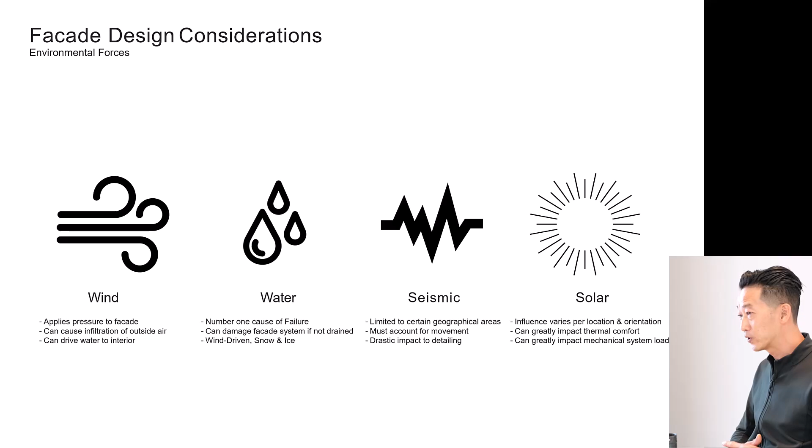Seismic, right? That's a bigger movement concern than wind even. If you're working locally here or some places in the world, seismic's a big deal, so that might be driving a lot of considerations. Solar, obviously everything to do with energy consumption, how we choose our coatings for glass, where we have opacity, where we don't. These are things we always have to consider as we're designing.

Then we move into things that are more specific to the building. Is it a floor-to-floor thing? Are there multiple floors? This influences how we're going to actually wrap the building. These things actually have to be supported, and a lot of times we go to the floors, but sometimes there are no floors. This building is a great example; we'll see some of that. Building deflections: with the wind and the forces, these buildings move, right? Everything moves.

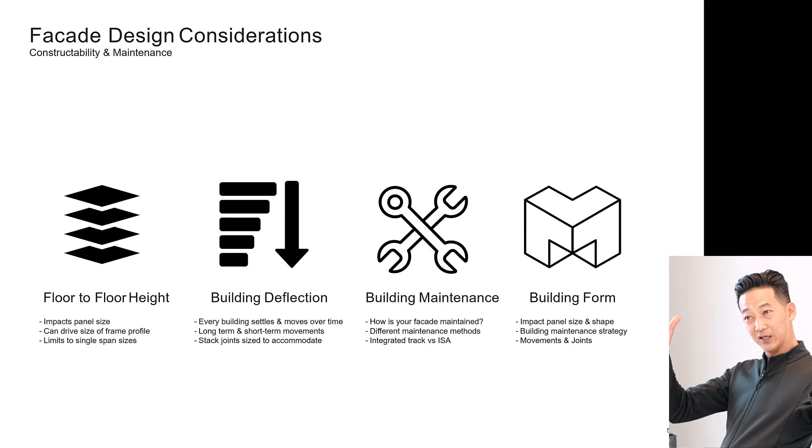Way early in design, I know specifically for a good year ahead of even getting to construction documentation, we were making sure that this classroom, which is kind of cantilevered in space, actually didn't move very much. And the reason being that curtain wall in between that long bar and this little space here, we knew that if it moved a lot in seismic, we'd get a lot of joints, right? So these are kind of things that all factor into, I think, in the end, the final aesthetics, right?

And continuity of joints, is that important? Is it not? Do you want to play with the joints? So, once again, constraints and how they can influence design. Building maintenance, you have to take care of your building, actually. How are you going to clean the glass or replace any panel in the building at any given time? And funny enough, if you figure this out, you probably figured out how you're going to install it as well.

And building form, like how complex is it? That's going to impact how you actually are able to install and maintain things, as said. And then, into specifics further, right? Manufacturing. Like, what are we saying? Okay, we like metal, or we like GFRC, glass fiber reinforced concrete, or we like precast, whatever it may be. All these materials have properties, right? And they also come with a certain kind of limit to how they're made.

If the thing, say, is metal, and it's a metal panel, well, you're going to be constrained by how it gets to the shop, right? Which is probably a coil. We know it's 5 foot wide. These kind of things, right? Tolerances, how tight are they being made there? And actually, how tight are things being installed?

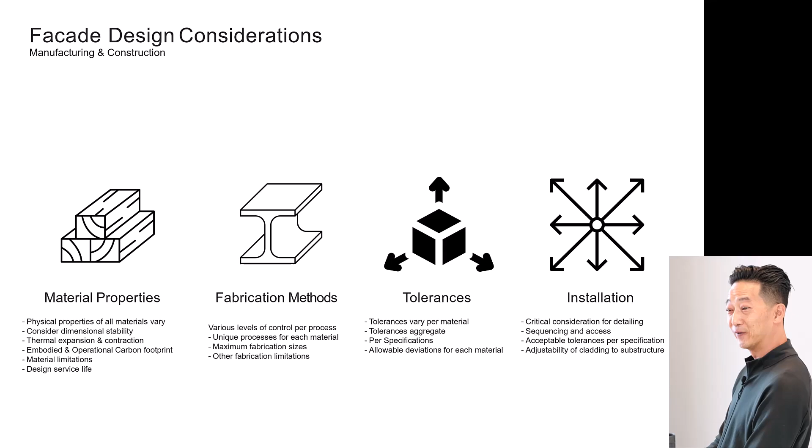And actually, you have an incredible amount of design power just through this little book of specifications, because at the end of the day, you can miss a lot of stuff in drawings, but if you have it in specs, you'll actually have some bargaining chips. Anyway, that's for way late in career, but leverage that at some point. Installation, once again, it's critical just how these things get installed. That's gonna really dictate if it's gonna be in budget, this, that, whatever.

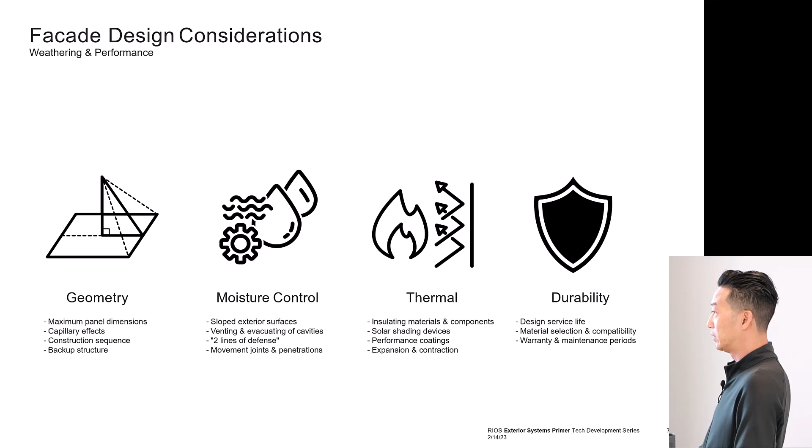Weathering performance, right? Geometry. Is there stuff where things are naturally not draining well? Is there stuff that's taking a lot of wind load? And then we always have to look through moisture control, thermal, and insulative qualities. Are there shading devices? Durability. So these are all kind of things that we have to think about. And I think at times some of these become larger constraints than others, but then those become opportunities, I think, also in pushing a decision.

So facade systems, real quick before we get into this deep dive. We talk about enclosures, and let's split it up into opaque and glazed assemblies, right? So if you look at an opaque wall, you might have a stucco wall there that you see as a barrier system. This means that that skin is actually where all the waterproofing happens. And anything past that is like a backup, but that's pretty much it.

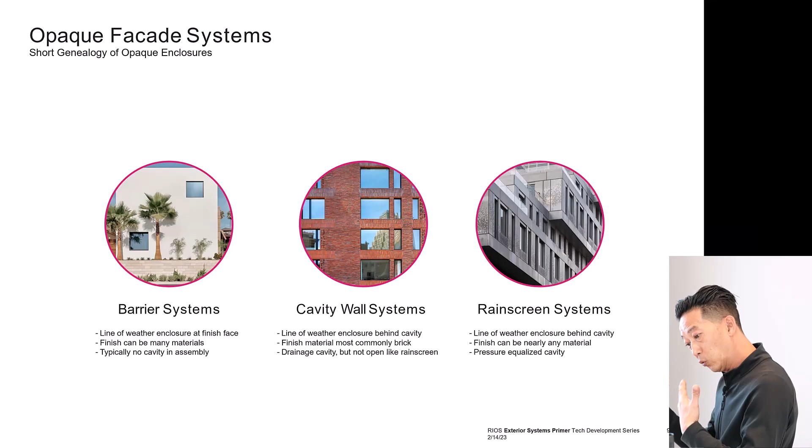Cavity wall, brick walls are a good example, right? In traditional ways, you actually have two wythes of the brick stacks that are actually creating a sort of cavity. The outer taking a lot of the weathering. Once again, I think there is some ability to have some drainage behind there, but the face is essentially taking most of the weathering. Any water behind there is just meant to be drained. It's ancillary.

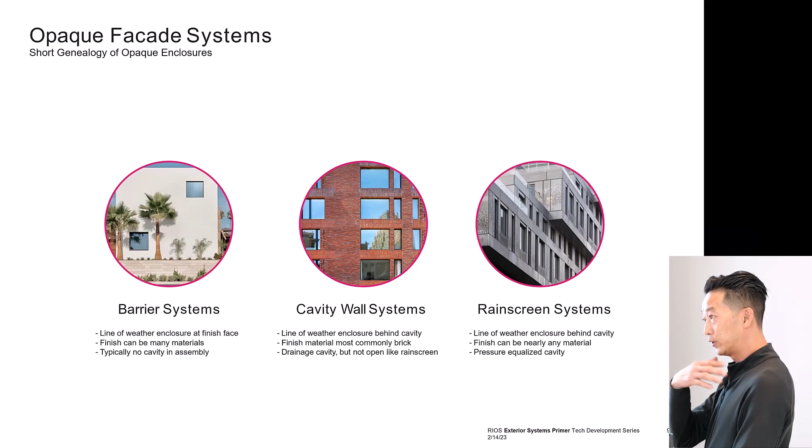Rain screen systems. This is the modern stuff, right? Everything on this building is a rain screen. You basically start with a waterproofed wall, and then any number of materials, metals, terracotta, GFRC, the list goes on, can be attached to this wall as an aesthetic and an initial weathering barrier.

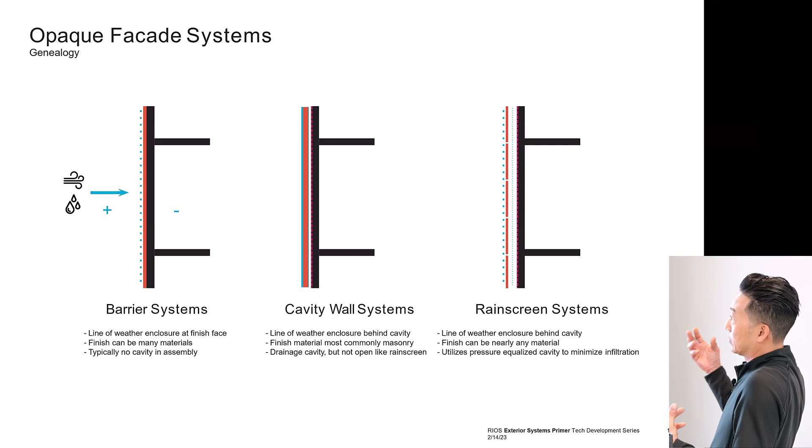Say you're doing a Rhino model, right? That's probably what that surface is. So as you go through the process, that surface starts to have a lot more drilled-in specificity and kind of accountability to that, both in form and what works for the detail, right?

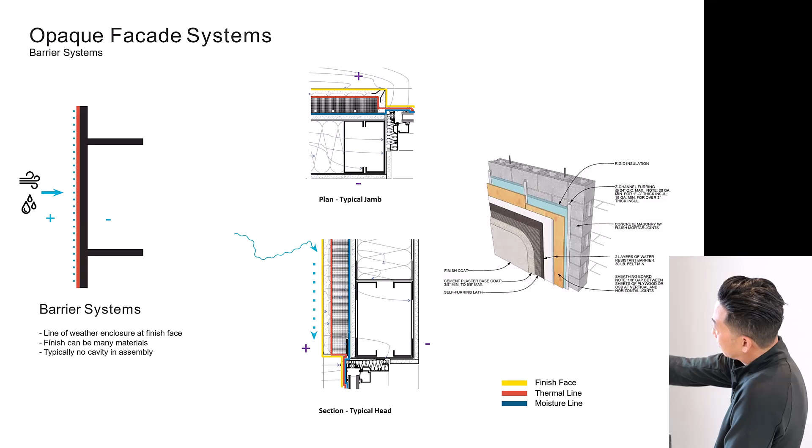So the thermal line, you can see it's behind the blue, and at the glass, it always comes together, right? Because the glass is essentially the aluminum frame where you get some sort of thermal loss. But the glass in and of itself, with the insulated glass unit, provides all of the three functions there. So you'll see that in the diagrams, where at the glazing, everything kind of joins up.

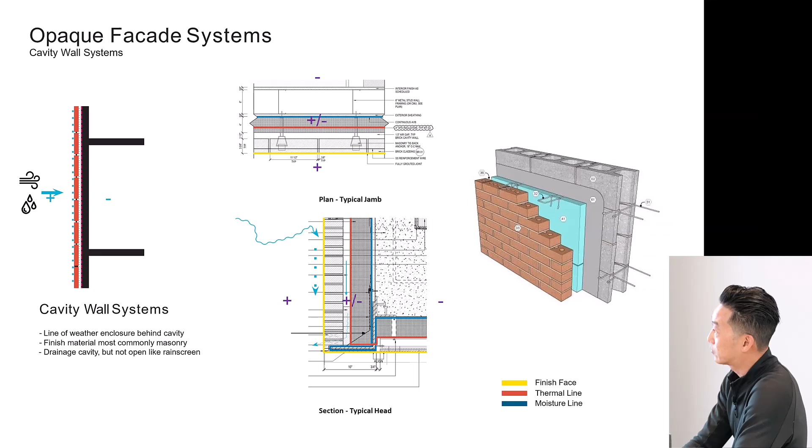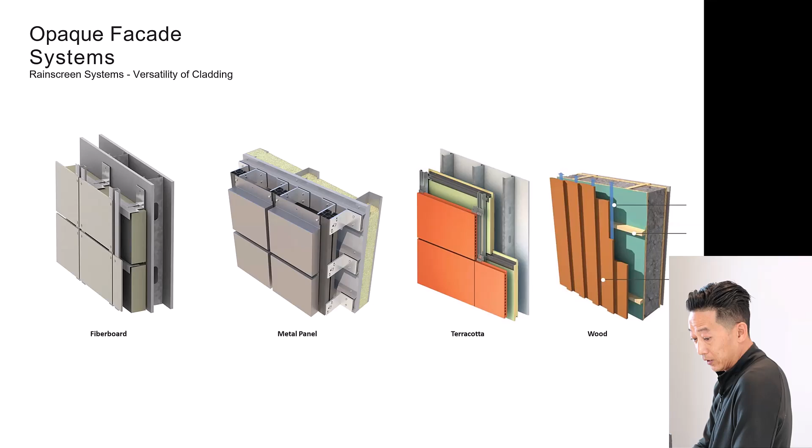And so here's some examples, right? You can take any number of materials and using girts, which are these horizontal, continuous little Z-clips or hat channels. We call them girts, just basically holding off the panel to create that airspace. And then sometimes just intermittent brackets. And you'll see how this can get quite complex. But the idea here is that, all these examples, some of them really complex, right? And that's easy to understand, right?

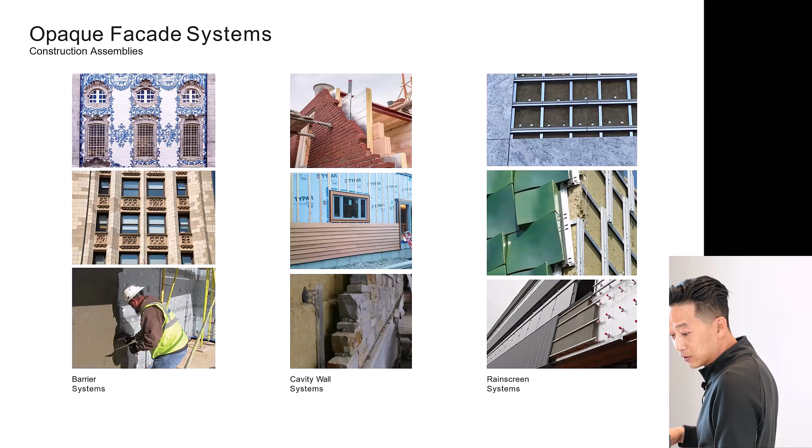Upper left, it's a tiled assembly, right? Pretty simple. And then you can get to something like a rain screen here that's actually terracotta and 3D formed, right? Cast. Here it's interesting that using that material, they're able to cast it in a way that if you try to deform metal like that, that'd be exorbitantly expensive, right? So there are these things that materials kind of inform about what you're going to do.

So last little bit here with the punch windows. Everyone knows what those are, right? Just basically a window that you have in a house would be a good example. It comes with a continuous frame and it sets inside an opening. Storefronts, basically, they're typically along the ground level of a building. Window walls, essentially like a storefront. They're framed in between slabs, but there might be this sort of Lego effect of components interlocking that happens horizontally.

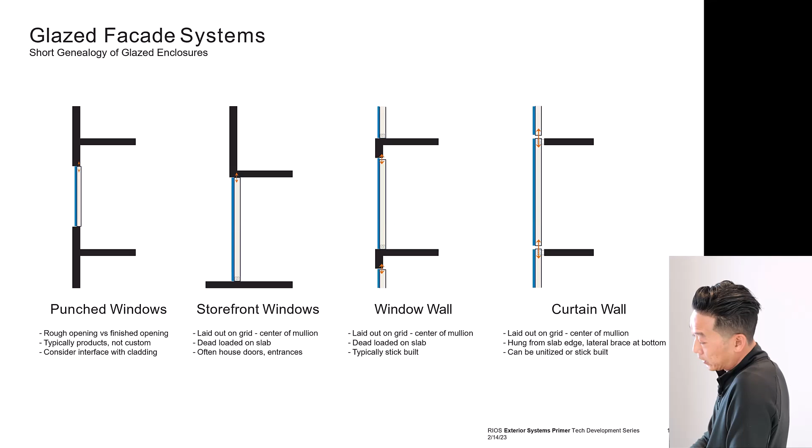So, with materials and systems, you're implying a certain way of support. So you see these little up and down arrows are kind of like where movements are happening, right? And the reason why that's happening, actually the two on the right, have floors. So this is like mid-story in a building, and the slabs are kind of going in and out. So there's all these kind of considerations when you're doing these things. Once again, the glazing is where a lot of these lines of continuity come together.

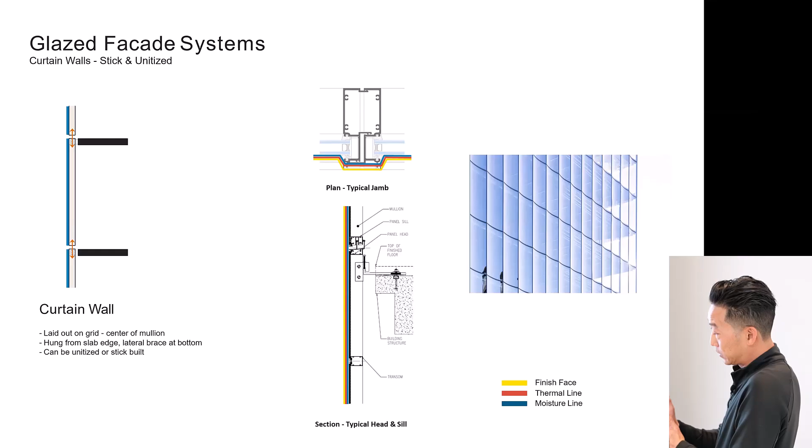And just knowing your systems and using them as a palette, in a sense. If you know the typical assembly of any of these things, you can approach designing with confidence, just understanding offsets, the sort of depths that you need for the structure and whatnot. And once again, you can permutate this stuff, right?

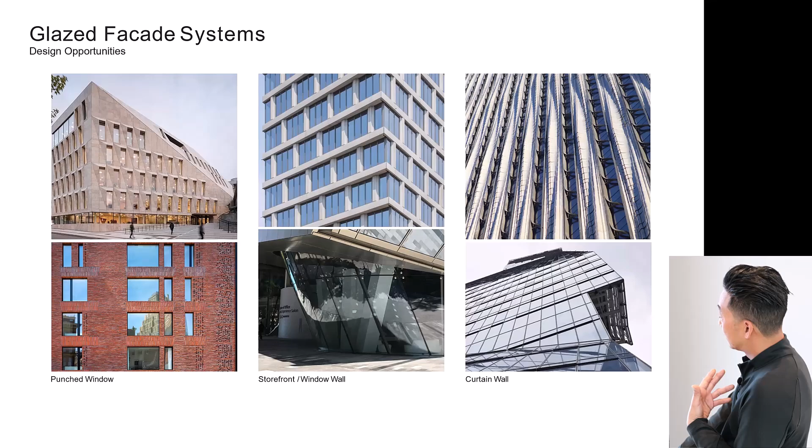Here on the curtain wall, this bottom right image, there are actually five means of support for this curtain wall as it goes up. You can see on the right of the image there are actually no floors, where you had to have steel which mimics floors. And why mimic floors? Well, the skin was meant to be continuous, and that informs this logic of, okay, that's where we need support.

So I think there's a lot of interconnectedness, right, if you think about technical design and what it takes to deliver something. And a lot of this is based on a systems-based approach. So everything we talked about, glazing systems, opaque wall assembly systems, where is that coming from? Well, it's coming from a manufacturing logic, right?

Way back in the day, the assembly line, Henry Ford, interchangeable parts, and then, all within our lifetime, this move into fully digital, right? This is the Boeing 777, which is fully digital. They used CATIA. There was no paper, so to speak. A high level of definition of detail in the model, down to the threads on the screw.

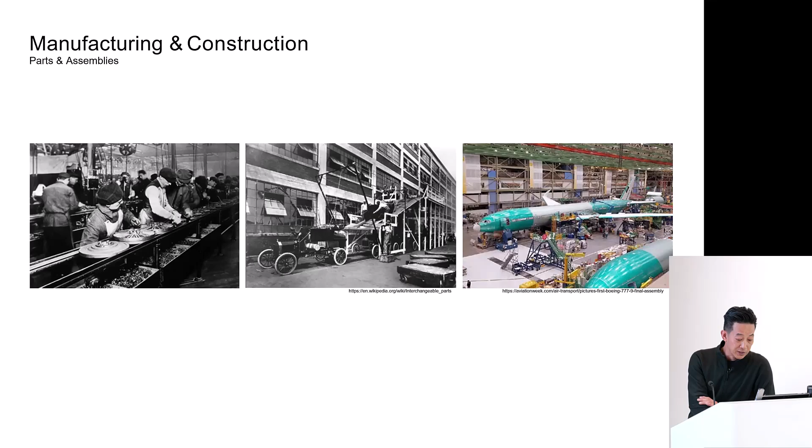So technology, right? What is it now? It's enabling us to do so much and push that into a lot of things. And I think some of the constructs that you guys made, the notion of taking digital fabrication logic, and that design data set becoming an engine for driving all sorts of things like analysis and fabrication.

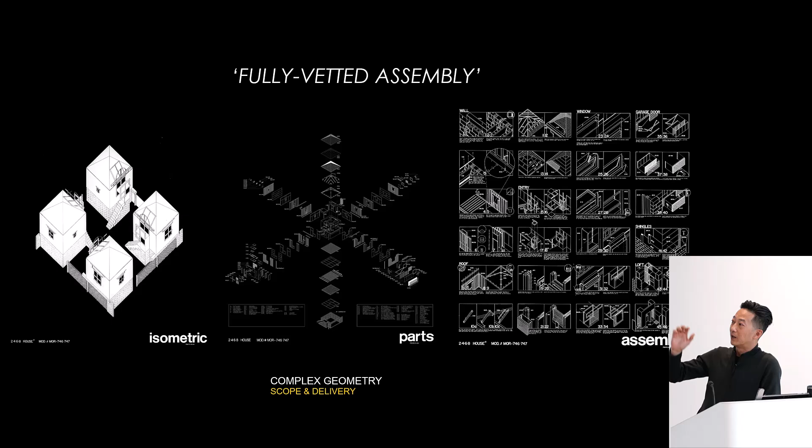And they even questioned the notion of the drawing; this does not look like the flat plan, section, and typical layout, but really gets into constructability in a different way, talking about the building as far as breaking it down into parts and wholes, talking about things in terms of assemblies, right? So we talk about things with the material intent, but that comes with a whole host of constructability constraints.

So complex geometry, right? Really important. What is the base geometry that's driving your thing? And there's no question that we can rationalize pretty much anything. We can optimize things with unlimited cost, with technology and rapid fabrication. More and more, I think mill time and things like that are not prohibitive. Things are becoming much easier to push fabrication,

but at the same time, you have to have restraint. If you start with faceted and folded geometries, you know that you can probably frame that out in an infinite number of ways, because a lot of stock comes flat. When you start getting into curved forms, like that storefront I showed you, rather than taking something like, oh yeah, this 2-rail sweep surface looks great, you actually start with something that you know is only single curved, say a cylinder, and you might tilt that in space, or you might trim it.

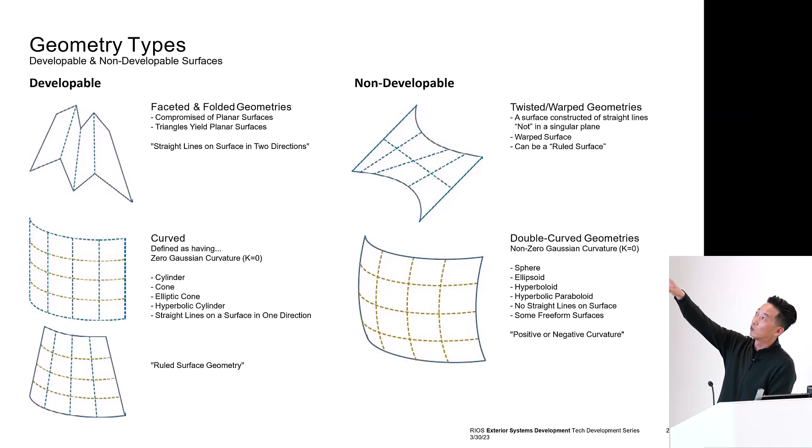Twisted, warped geometries. These are ruled surfaces as well, meaning they can be described with straight lines, at least in one direction, right? And it's a similar thing with the cones and the cylinders and the folded geometries: they're developable, right? You can flatten them down onto a flat surface.

Whereas things like double curve geometries, you cannot, right? So you got to think about materials that are moldable, or if you're doing metals, to have the money to deform the metal. In the end of the day, you might have a finished panel that can do whatever it wants, but you have to somehow support it.

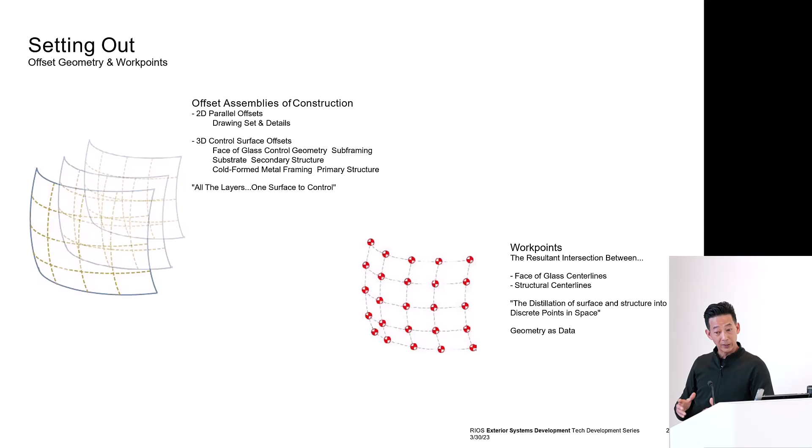So the notion of geometry, setting out, right? You start setting out rules, and there might be planes that cut through your surface that relate directly to your grid lines, or you start to have datums. I think you start creating project-specific setouts and work points. You'll see in the details we have these little work points, and you'll see how those become important.

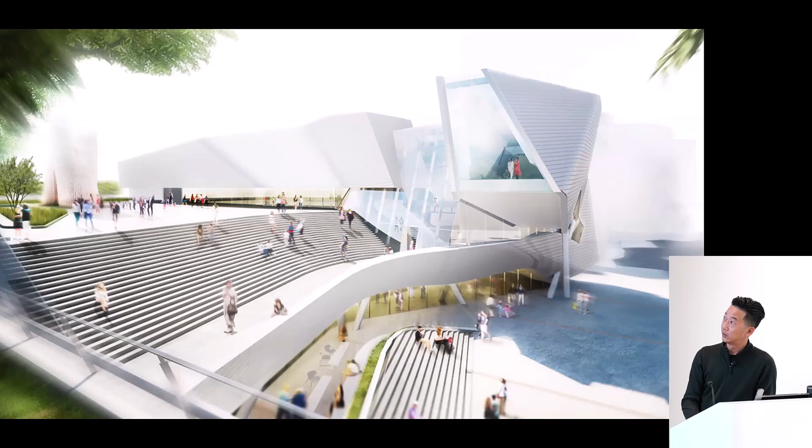So here we are in Costa Mesa. As I said, this was the office's first fine arts museum. This is actually an early rendering in concept, quite a clear kind of understanding about form. Really, I think a lot of it is pretty consistent with what is there now.

And in fact, this is maybe a little later rendering where the bench down at the entry is actually detached. But the notion of challenging what a plaza was—this arts complex has an incredible amount of venues going on, but it didn't have a real center. And there's that Serra sculpture out front, and it was thought that the building could have an elevated plaza, or create a new center, at least a public way to invite the public in and really work with the circulation that already existed.

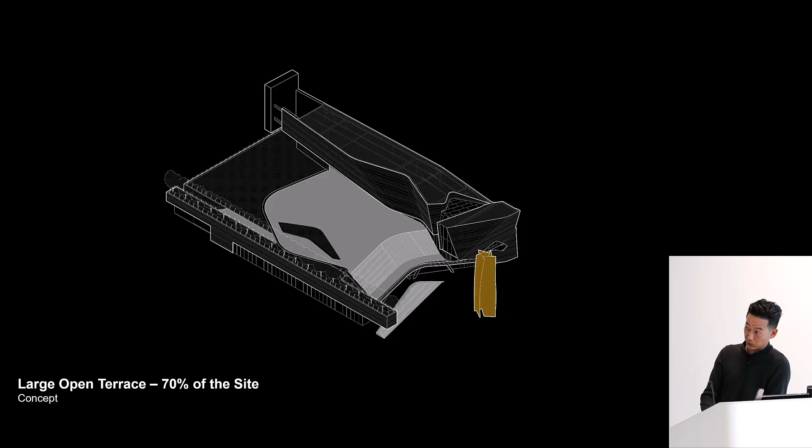So the notion of the Serra Connector and conceptually that inflecting into some of the form. The notion of the plaza—at one point this was even connected, this whole plaza went all the way up, but now it becomes more of a formal gesture, more so due to strategics, due to code and fire egress, which is why that's not connected. But conceptually, diagramming this out in a really clear set of images based off of the design geometry, the same geometry we're using to drive construction.

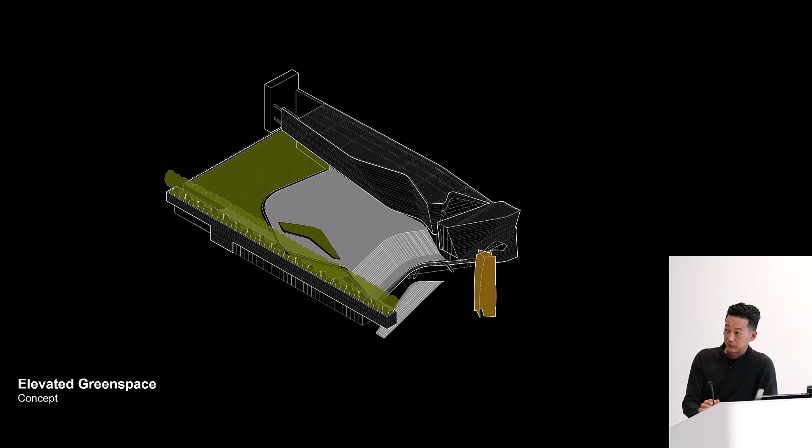But in any event, the idea of an elevated green space, to really heighten the experience up there on the plaza. And then here this image which shows a terracotta facade, which we'll kind of deep dive into.

So yeah, and the other hallmark, I think the trademark of this, is this sort of submerged or suppressed gallery space below the plaza. The whole roof of that, you'll see pictures later on, is basically a concrete slab that's waterproofed like a bathtub. So it's the most robust waterproofing method, using hot rubberized asphalt. It's actually almost like a medieval technique.

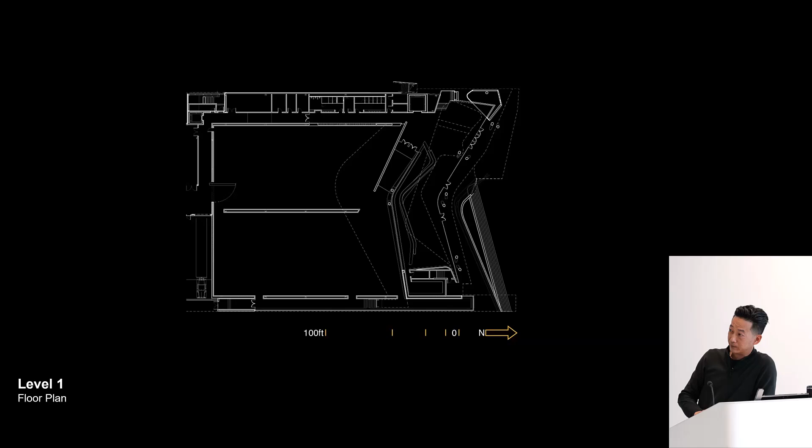It's like hot tar, right? But this will never leak. And you can kind of see here along the bottom, that sort of window gallery, as it's called, that you could view art from.

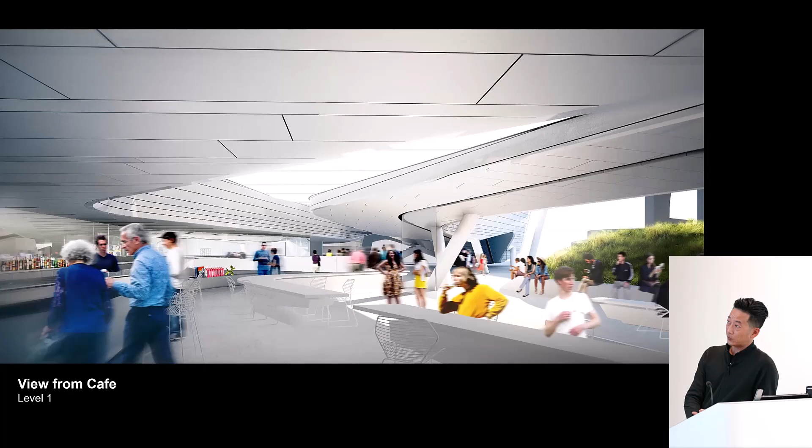And so from early on, you could see really the notion of continuity and this sort of material, which at the time we didn't know was going to be terracotta. We had thought about materials such as GFRC, which is glass fiber reinforced concrete, which can be sprayed into a mold. Basically it's similar to concrete, but it really is a composite, that could be easily achieved or used to achieve these kind of images.

But I think you pick up from the images that a lot of this, the ribbon-like quality of this facade, actually came into the building. And so I think it was almost like this really celebratory kind of element in the building design itself.

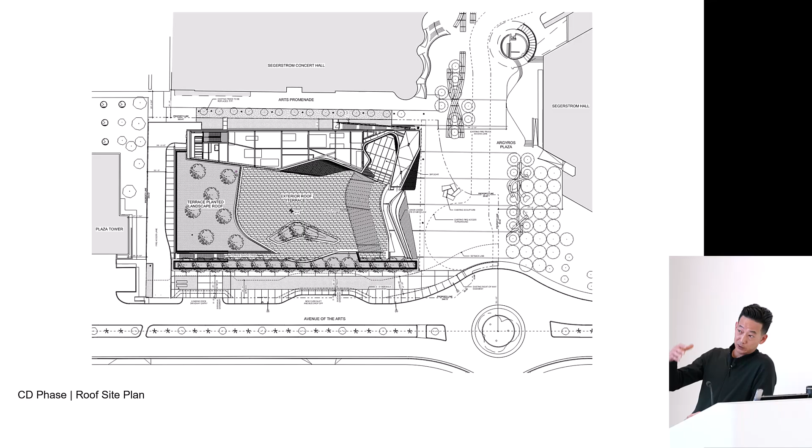Like in most buildings, you have to go through the whole process of concept, schematic, where you're really getting the larger site constraints done, like egress or fire access, all these sort of things, and eventually into design development, where you really have the design locked down as far as form, and you're developing those systems and the program itself. And eventually CD phase—this is where we're developing a set, which is essentially construction documentation phase. We're creating documents that are essentially like an instruction.

Manual for the contractor, and they are contractual, because what you say is what you want and what is priced and has to work. So going through all the plans, the typical plans, these are really great drawings.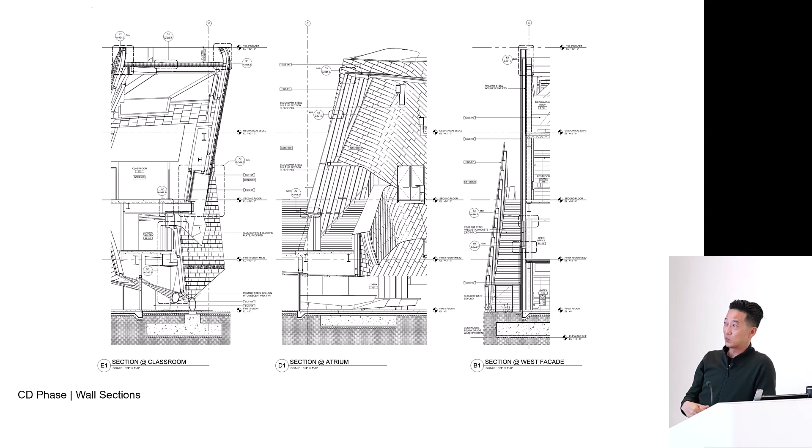So look at the wall sections. As far as facades, they're usually blown up at a larger scale. You can't escape the way things are intended to be supported or not. Everything you see here has actually been sized and engineered. All the W sections in primary steel, all the members, this middle section is cut right through the curtain wall there at the door. Everything's been sized at this point for the most part.

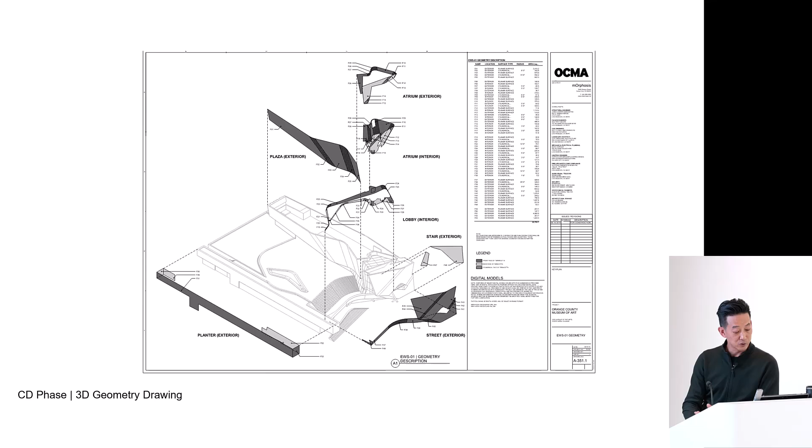Really it's just trying to break down your building in a very simple way, because you're going to give this to someone and say, okay, what's the price? And immediately, if this thing is confusing, you're going to get a high price. It's about drilling through the problems and really documenting your design in a way that, we're not talking about colors, we're not talking about things that are just overtly aesthetic. But all this stuff invariably is tied to that in support of the design, but also is an opportunity for creativity in a sense.

So like a basic rain screen system. Here's a classic system sheet where we have a plan, section, elevation, usually floor to floor, grid to grid, so you get the sense of how things are being supported from a primary steel standpoint to secondary to the actual panelization of the skin itself.

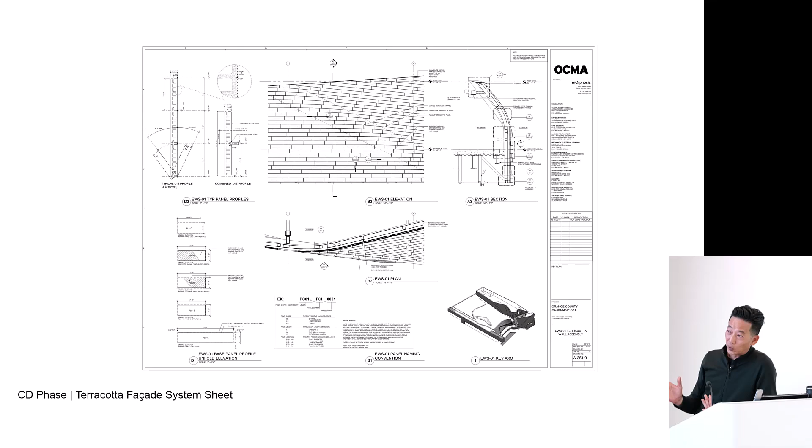And from these, we key off details. Here we're talking about types of panels too. On the left we're talking about flat panels that are curved and flat, and then flat and curved. And then the long ones, this is sort of a cookbook and description of the base components that go into this.

These were kind of special drawings that we did in collaboration at Walter P. Moore, and that team there we worked intently with, even to the point of what this is showing being the steel. Usually in a wall, everyone knows metal studs, that's what would infill all of what you see here. But what we're really saying here in our design contract, our construction documents set, by showing the steel is really giving a strong indication of how we expect this thing to be supported, and why.

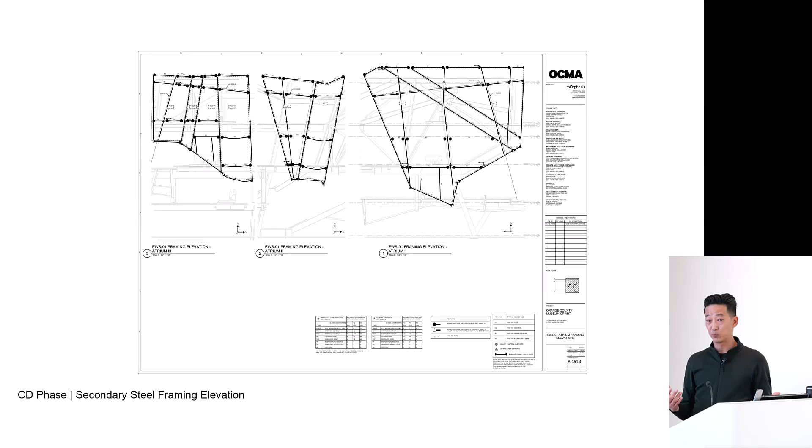I think what's important is that was so indicative to how our system would need to work in order to avoid all these new joints that would show up. If you look at this building, you really don't pick up anything but the continuity of the pattern. And that's because all the support behind there was worked out to a point where we actually don't have any expansion joints in this building, which is very, very rare.

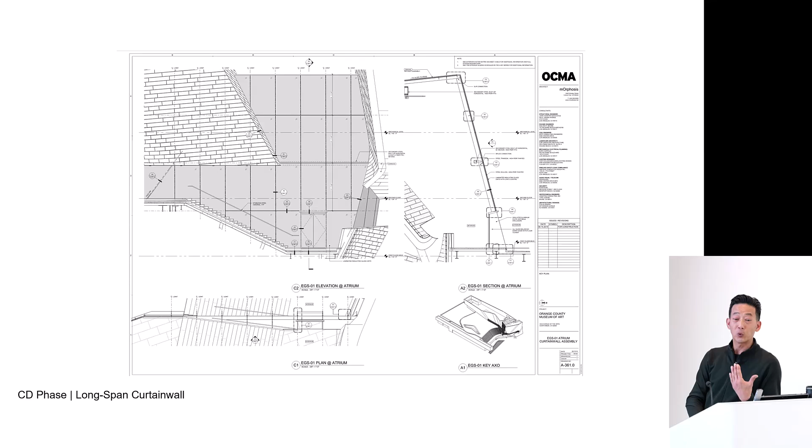So anyway, drilling into the weeds there, but the document set, we go through every system. So a curtain wall system, plan, section, elevation. We give it a number, we go through details. And I think the thing to take away from this is a plan detail.

The terracotta rain screen here coming up to the glass. You see this L shape is actually mimicking the T's that are in the middle, but at the end it worked better as an L. You never see the other side of the T. So all these things kind of coming together.

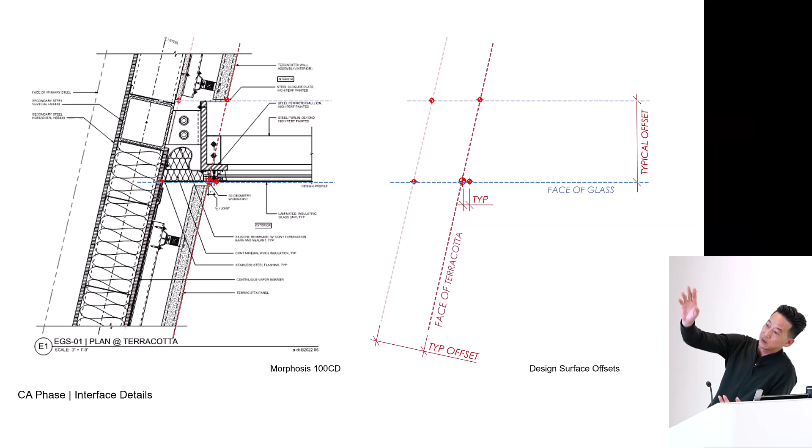But at the end of the day, you're taking this face of glass or the face of terracotta, and you're offsetting these things in space. And these are directly correlated to details, where you have typical details giving these offsets. Everything's been sized.

This is eventually what we end up getting back from Roschmann Group, who was the German subcontractor on the glazing that did all the custom steel. So intrinsically, their stuff is not surprising us, but what we're having to do is just contend with variances in their system or whatnot.

But really, this gets to the notion that that's a very strong part of design intent, is that actual geometry. And we even did these kind of secondary steel diagrams for the sky, the curtain wall in the previous image. This is the skylight that you see right out here.

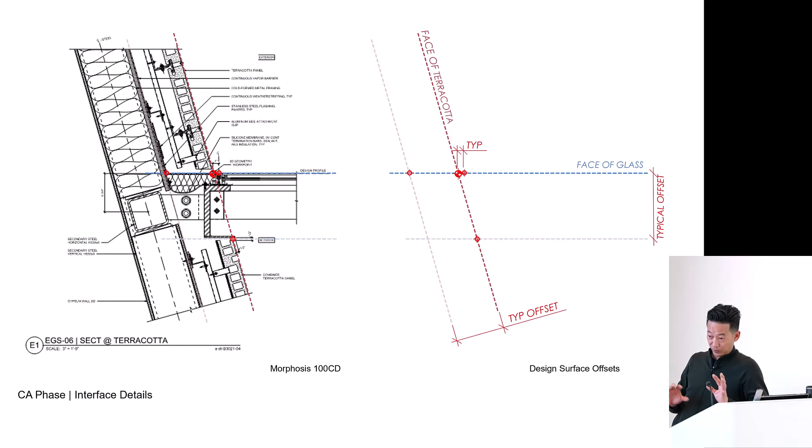So yeah, a lot of thought going into the setting out and the rigor of looking at each one of these systems and all the unique conditions. But at the same time, just being very strategic. If you do certain things in selection of the system, or give certain considerations, you can drive things after a while from a digital surface control standpoint with confidence, because you know what your systems are doing.

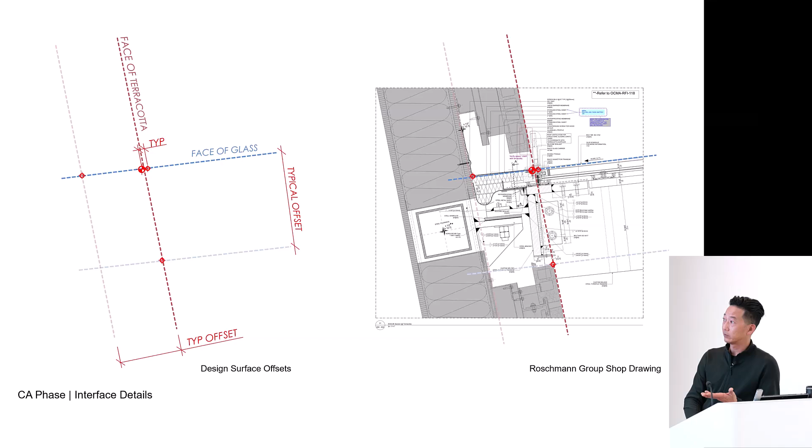So yeah, once again, all these details. No irony that the skylight terracotta to glass detail almost looks the same as the plan detail, right?

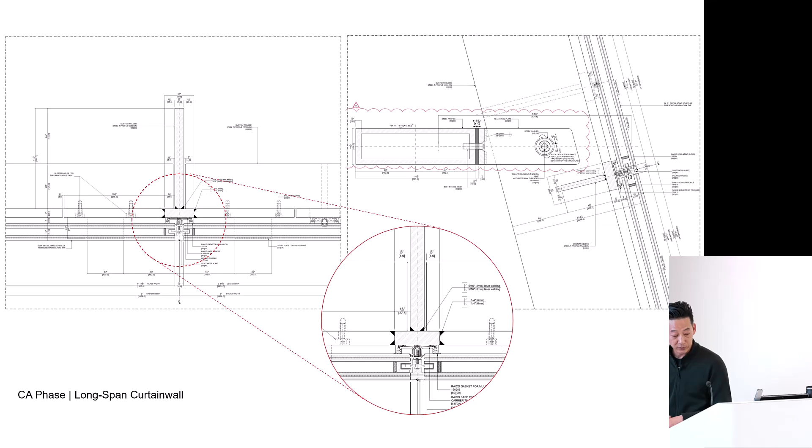The notion of continuity. Here's a zoom in on the Roschmann glass design. It was predicated on this rather than structural sealant, which would bond this IGU back to that steel T. What you can see here is an aluminum carrier gasket and aluminum piece that they screw in, then take this toggle, which goes in, rotated 90 degrees, goes in, rotate it in, and then they screw it in. So this gives the same look of the glass, of being seamless and capless, but it's a completely different system.

So it's one of those things where you have to anticipate what things could change, but be very deliberate about documenting things you want done a certain way. I think in doing that, all the other pieces fall in place more or less.

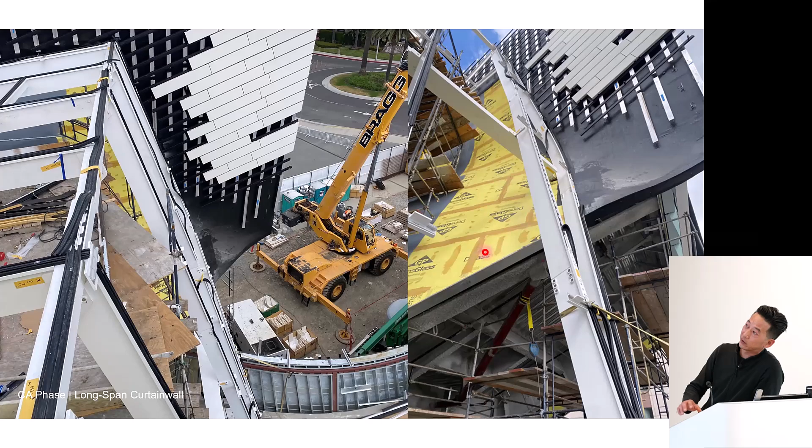And at some point this becomes lowest common denominator, right? This is some guy out there with a 70-pound piece of terracotta trying to get it up in the air. So there's a lot of thought to how this stuff needs to happen.

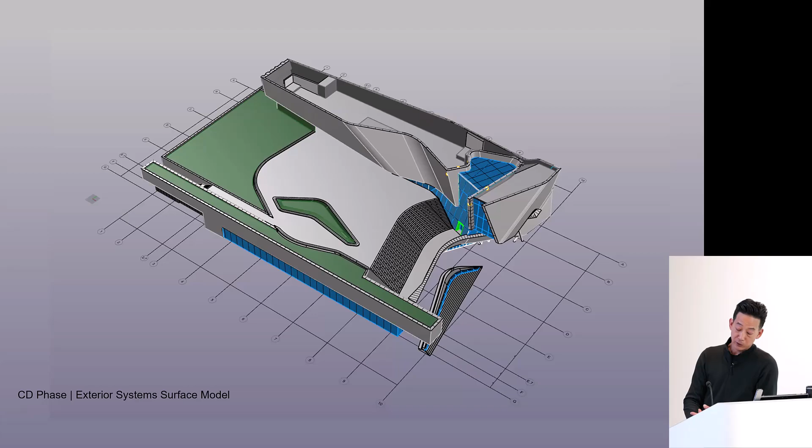I'm going to have to go a little quicker now, but really the exterior system surface model, each one of these colors is a different system, and we split up the model to obviously drive the form, but also the panelization with the center lines. This was a study looking at the continuity in the joint sizing. We had these thicker horizontal joints to emphasize this kind of initial ribboning that we had seen.

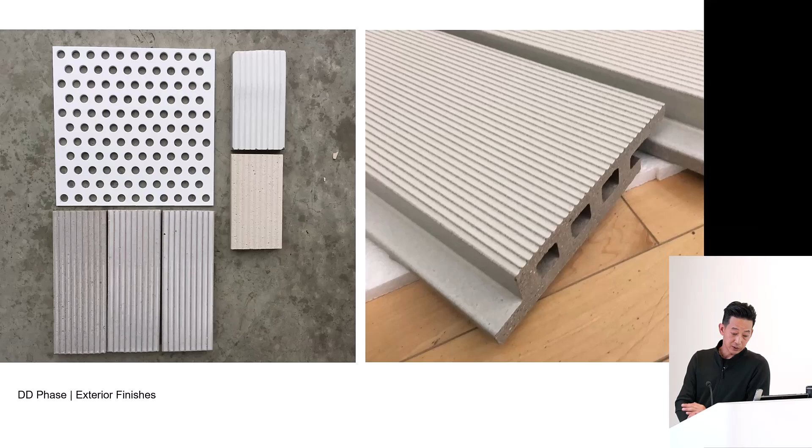We went through costing for metals and GFRC. Ironically, terracotta was cheaper, right? I think it also came from the sense that we had not rationalized the panelization to a degree that I think any material would need, early on. But we saw the legs for terracotta.

Glass selection wasn't so daunting. We knew we had to meet certain performance requirements for energy, but through that you're still picking the aesthetic quality of glass, whether maybe one manufacturer is slightly darker or more clear or less green. The quality of distortion in how those lights of glass are being fabricated. So those kinds of things are looked at.

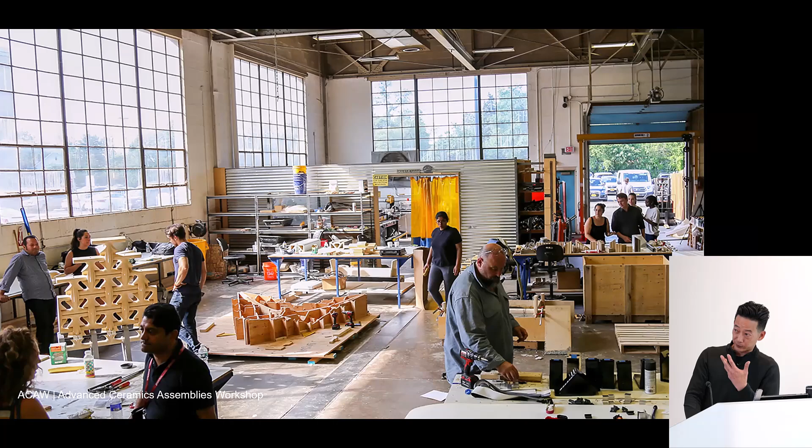And with terracotta, we got good pricing and we had already done some research. This is at the Advanced Ceramics Assemblies Workshop, actually the Architectural Ceramics Assemblies Workshop at Boston Valley Terracotta, who was the final subcontractor for this terracotta skin. They sponsored a workshop where design professionals and even universities would go and explore terracotta in high performance assemblies. So we had Walter P. Moore and One-to-One Architecture and some other colleagues, Studio NYL, and we took this project, while it was on hold, and explored terracotta in the geometry.

In this one, we're actually pulling the ribbons apart from each other and doing some things that really weren't helpful for how you construct it, because it meant all the fittings would have to be unique and whatnot.

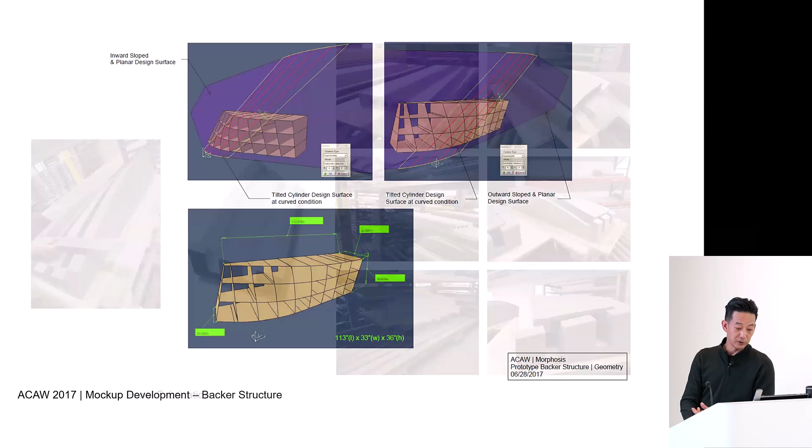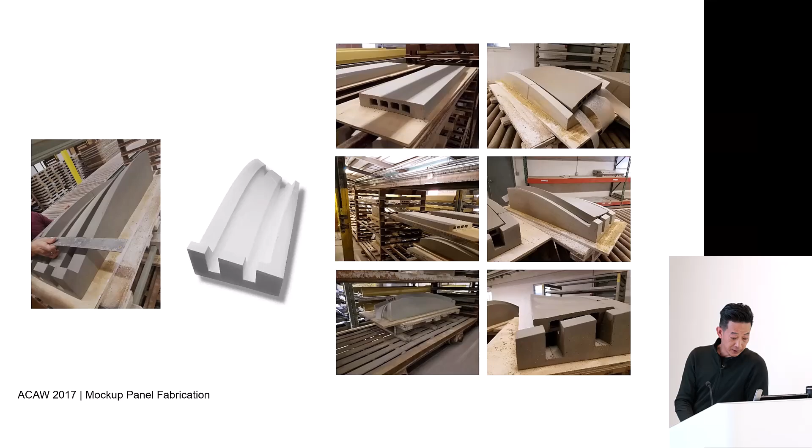But we did learn a lot about forming of clay and what it would take. And what you see here are the actual project pieces that are being laid onto clay forms here. And interestingly enough, the clay forms are what were needed to fire those, because anything else, even steel, would melt in those kilns at those temperatures.

So, looking at everything from the complexity of, okay, maybe that wasn't a good idea, to, it's feasible. We can pattern cut little pieces to fill in the ledges and the soffits. But I think a lot of this was in learning, like what happens when the plasma cutter goes down because someone is using the ceramics kiln and you can't fire up the plasma cutter because the breaker will break.

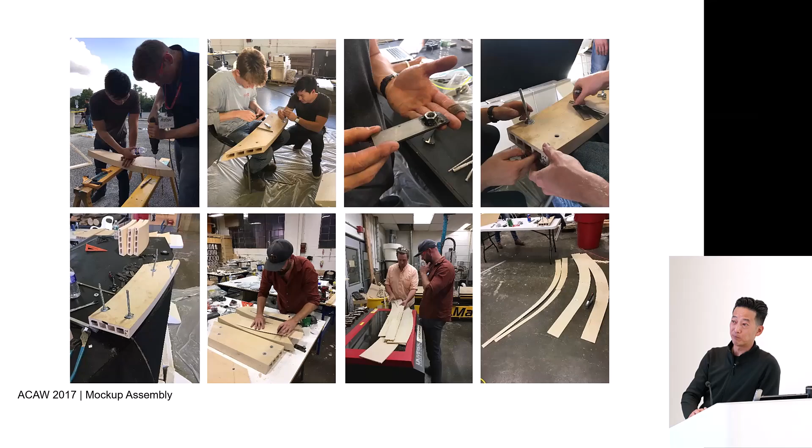In any event, these things happen in construction, right? Suddenly we're doing these fittings by hand that were actually almost impossible to do by hand. They were so unique. But going through all the motions, really even looking at the building in solar and what are potentials for, this is an early thought on evaporative cooling on those steps.

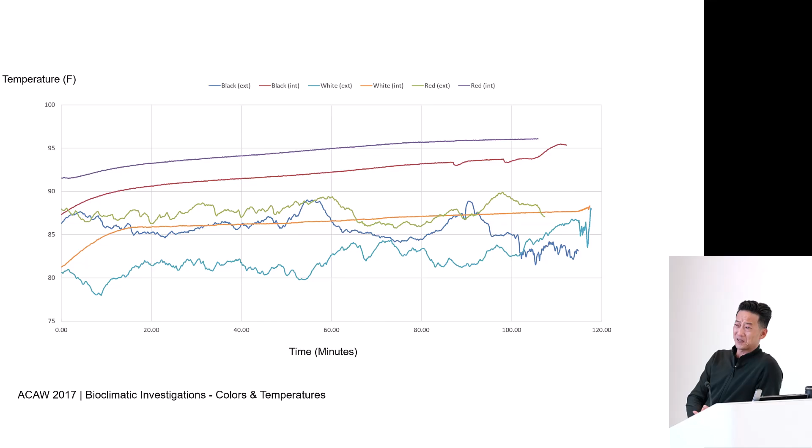If we're terracotta, we looked at the color and the thermal properties of terracotta. These are some readouts that we had inside the box, outside the box, red, white, black terracotta. In the end, there wasn't much difference, but what was odd was there wasn't much variance from the internal to the external. And that's just, I think, from the fact that terracotta has such a thermal mass to it that it almost acts like a buffer.

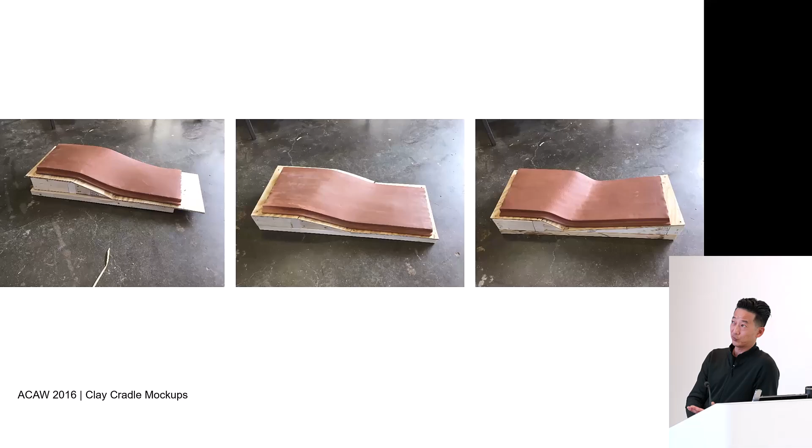So yeah, even real novel ideas. This guy from Walter P. Moore was like, yeah, what if we did this? And so, in the end, what you might wonder is, if you notice, a lot of the panelization here does not look like this.

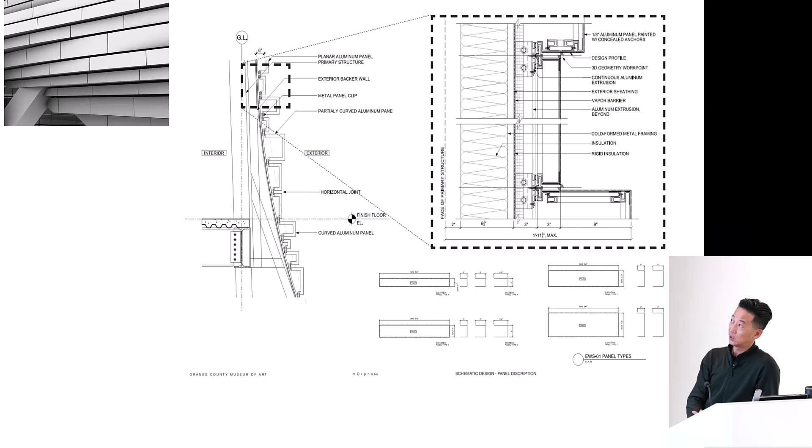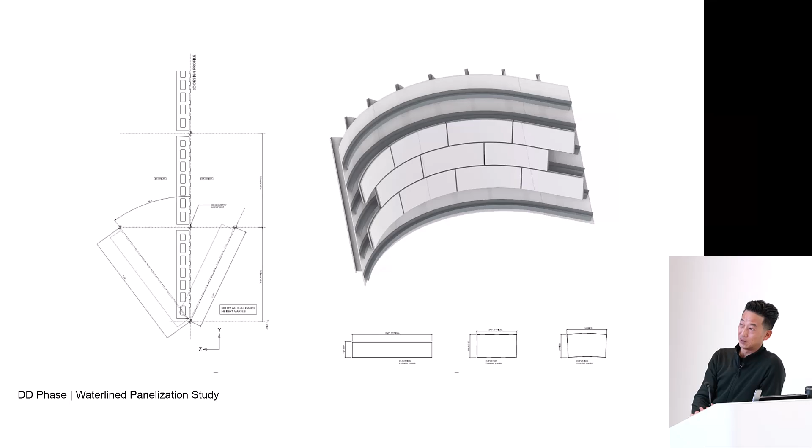So this was the earliest rendition where you're just taking horizontal slices through this thing like a wedding cake. And as you can see here, what that creates is a whole host of uniqueness, which was very difficult to deal with in metals or any material. You'd have multiple extrusions, die sizes, whatnot. Here we're showing how you would actually need 3 different dies in order to take care of 3 different angles. They're all the same vertical height, but it actually creates more uniqueness.

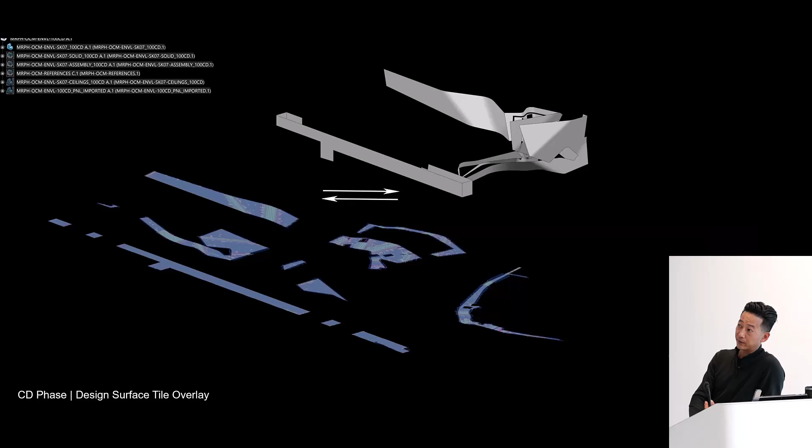And then we said, well, all of the base geometry is developable anyway. You can flatten it. So what if you take a grid, put it on the surface itself and re-roll it? So if we're using just cylinders and planes as this drawing is showing, and this base surface can be unrolled or flattened, you can apply this texture and then re-roll it back up. And a lot of this was initially just set out on a certain grid like this planter box.

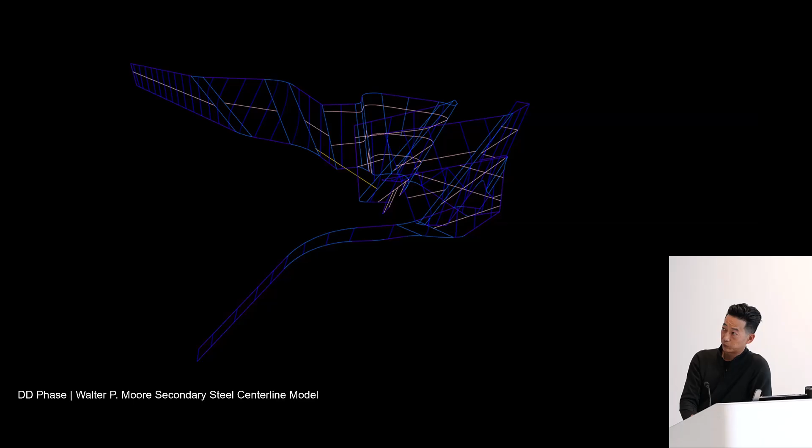But everything you see up here was someone on the team really manually crafting that, making it look right, and not making it look overt through the curves, really feathering that out. We got models from the fabricators that came back to us. We overlaid them with our models, right? Look for discrepancies. And in the end, everything just had to be pushed through and tested in shop drawings.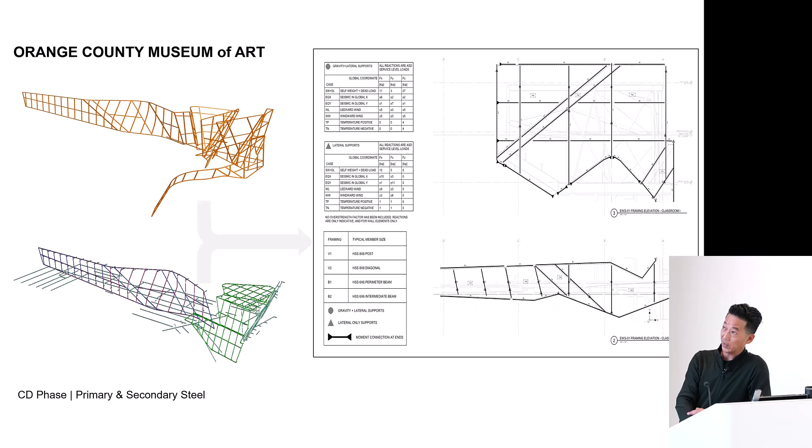And so this is the Walter P. Moore model that Kais's team actually developed, showing basically all of the members that aren't part of the primary system, required just for the glazing or the terracotta skin to exist. And you can see more of that here. And in the end, you get into their full construction centerline model.

When we got to construction, the construction team would take all these models, start overlaying them with their subcontractors' models, but all driven off of basically our models, right? And eventually what you see there in green is the actual steel model that the contractor had. This is just an overlay showing all that secondary steel that we had set out and intended to be there.

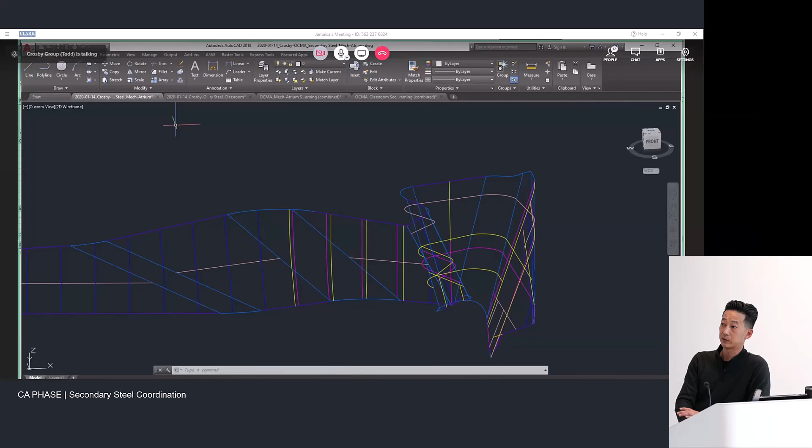The yellow is showing the moves, the purple is the original position. So there was very little variance and deviation. And eventually you have a high-level construction model, this coming from the steel fabricator, everything being jigged up and tested in the digital workspace before you get to site.

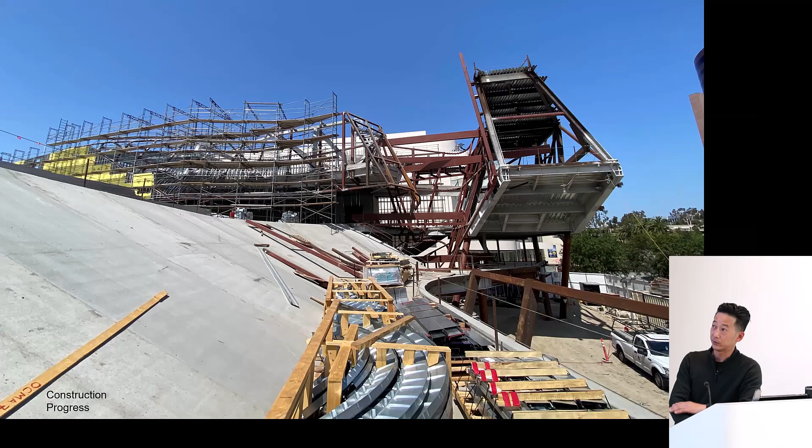This is that stairway. You can see this slab underneath the precast risers running across there. This is before you get the waterproofing on there and whatnot.

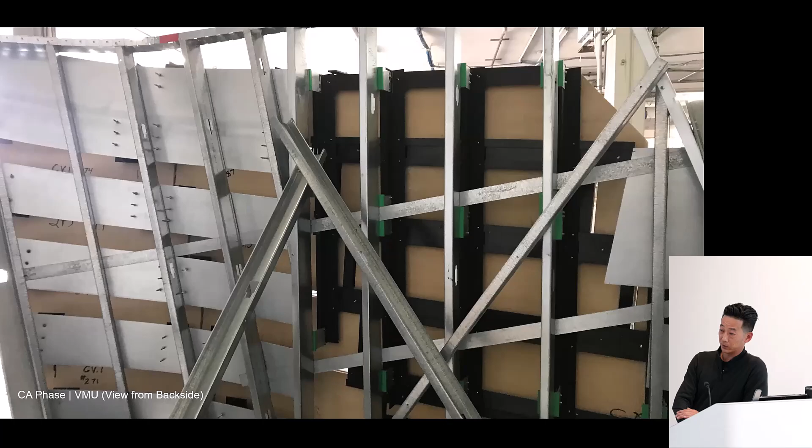So, I'm going to blow through this last bit, but mock-ups and testing, this is super fun, where we're doing constructs and testing out what is a curved framing assembly, what is a flat or planar assembly, and really having the subcontractor test those out, and then into actual performance mock-ups where we're testing seismic and spraying this thing for water.

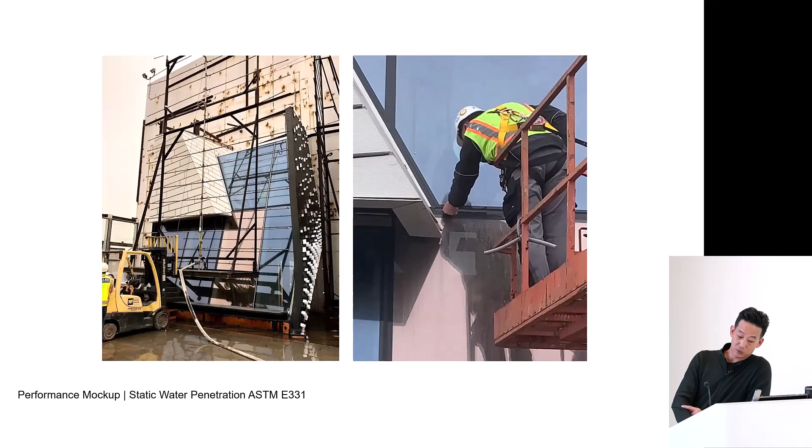Here you see the clips that we're holding on the terracotta, which actually we found leaks due to the green bits that were the thermal break. Just going through all the testing, typically just using a fan from a prop plane, prop engine, blowing water onto this thing, looking for infiltration.

So all these things just continue into construction administration when we're on site, putting things on the wall, all these different weird situations with the terracotta, and here, seeing a portion of the lobby where the pattern's completely gone vertical now, right? Those pieces had to be slip cast because they were so big. These pieces were special cases, right, where all the slivers you see everywhere,

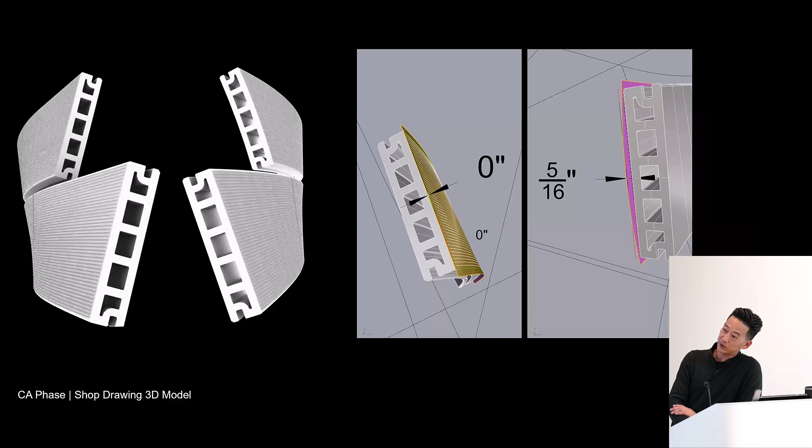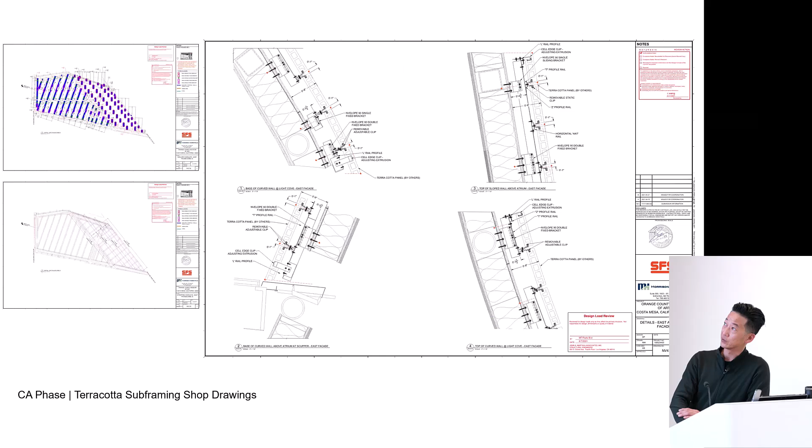and basically just working through the fabrication. This is them at Boston Valley Terracotta doing QA/QC on the variances. So very small, less than 5/16 of an inch variances, and then shop drawings, all the clips. Somebody's working out every single one of these clips in 3D. I can't stress how many people were involved to get any given project done, but this one especially. And just working out little problems.

How do you install the glass here? This is a little pocket here on the side of the curtain wall. You'll see that they never even put the removable panel on there that we suggested. They felt that it was fine without. I think we probably okayed that. But everything down to even the nuts that were kind of custom designed.

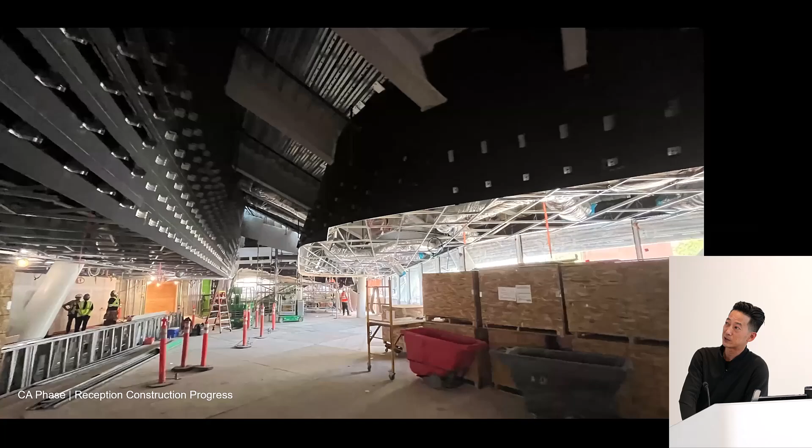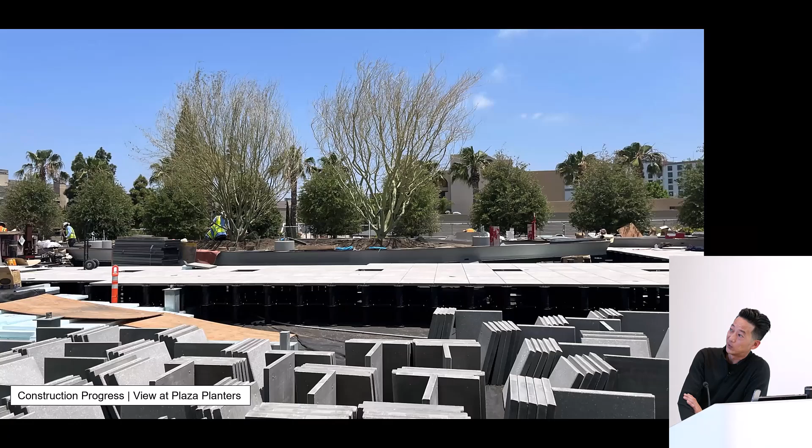All the interior is actually suspended on stud framing. So that's an interesting point, at what point it goes from stud framing to steel support. And basically, throughout all of this, the notion of continuity, and even with the plaza, right, you see how there's this huge cavity underneath that is just a waterproof bathtub. And going through all the different installation,

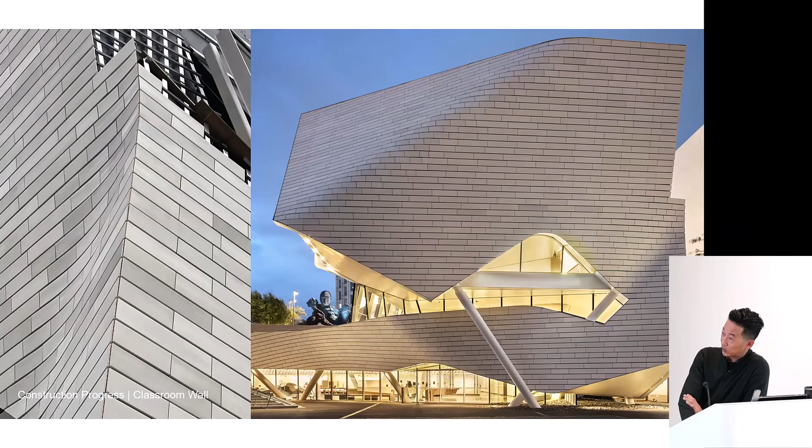field cutting was important. So what's interesting to note is every single one of these edge cuts is in fact a field cut, and that was one of the ways that we got this thing under budget. Because number one, if you had these made in the shop, they probably wouldn't fit once you got out to site exactly where you wanted them. The notion of craft and somebody being able to feather in all the anomalies and just massage those out was important.

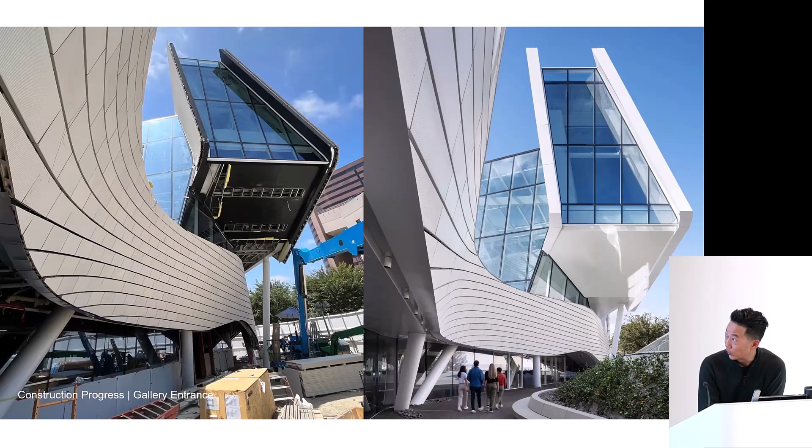Just getting to the end of it here, but final pictures of some of the construction. This is that planter box. It's essentially one big truss that is just clad in that terracotta, completely flat, and then where we are right now, which is actually pretty pronounced, all the curvature that's going on this wall here as well as down low. I always joke how that looks like a fisheye lens, but in any event, that's it.